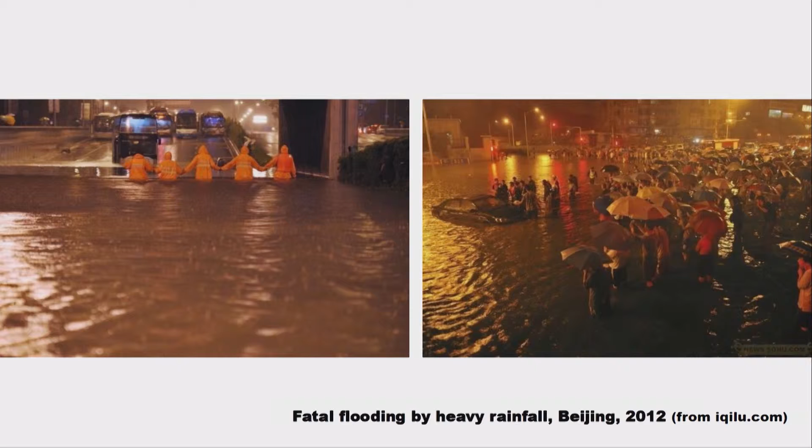This is what happened 6 years ago in the downtown area of Beijing. This flood caused by heavy rainfall actually killed 79 people within one night, and some of them were even killed inside their own vehicles, trapped in tunnels. This really rang a bell for the government that we really should do something regarding water management.

And then there's a lack of institutional innovation. We are still stuck in different sectors, different departments that are only in charge of their own narrow responsibilities. And then we lack awareness of water scarcity, because we are always taught that China is a big country.

We have lots of natural resources, and water is not really that scarce. Then we have water pollution, as I showed you, and also, last but not least, we have less market involvement in the water tariff system.

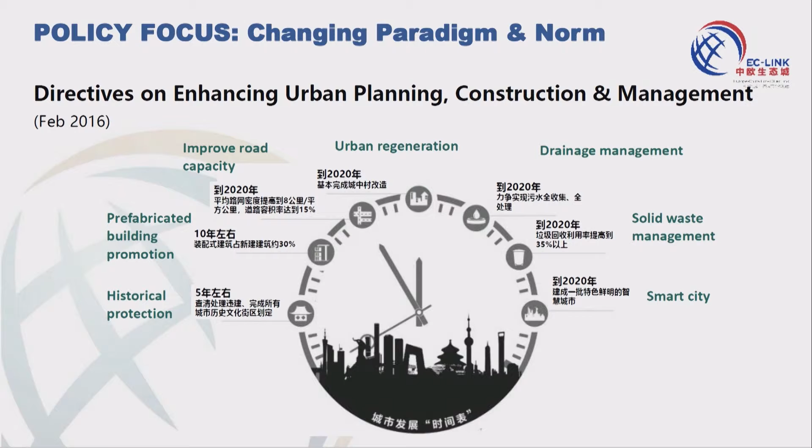The most important thing related to water management is drainage management. We're supposed to have 100% drainage management by 2020. That refers not only to the cities but also the suburban areas, which is quite an ambitious target.

As you know, China is a very centralized country. Because of the centralized political system, governments at the local level are now really pushing forward on environmental protection and trying to save the environment.

Also the guidelines on the lake governor system and the guidelines on the river governor system, which are more about institutional design. Because we are a centralized country, once we grab the key person in the system and appoint them as the so-called river governor, he can actually do something regarding the river.

Today I'm going to talk a little more about sponge city. During lunch, someone asked me what exactly is the sponge city. I would say it's a similar idea to LID, low impact development in the US, or nature-based solutions in Europe.

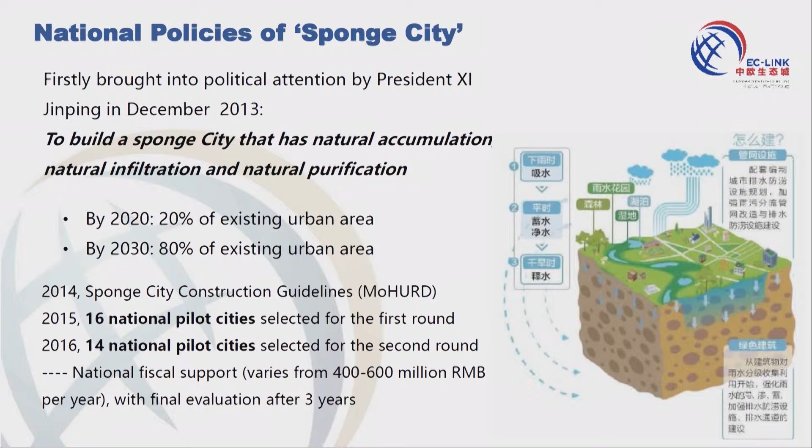In order to operationalize all these ambitious goals, we try to establish a kind of institutional arrangement. First of all is the organizational structure.

If I take the sponge city as an example, there is always a so-called leading committee, led by local political and governmental leaders, consisting of different governmental officials from all the relevant departments.

Usually it will be led by the urban planning sector, construction sector, or water management sector, but it's also relevant for transport, environmental protection, etc.

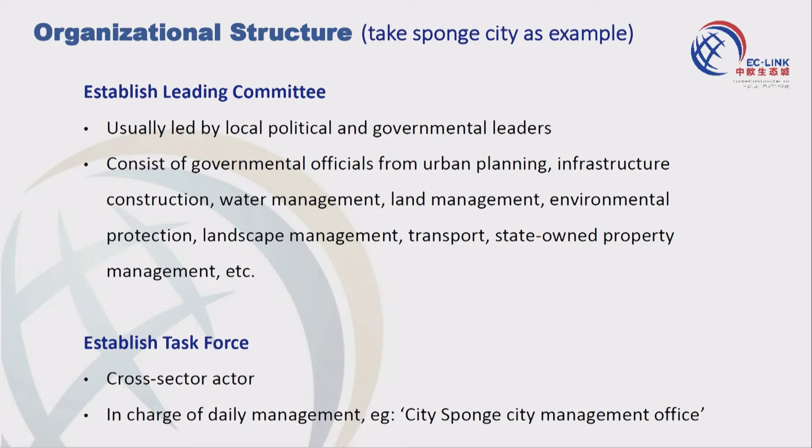Beneath that, we establish a task force in charge of daily management, the so-called Sponge City Management Office. To implement that, we have established this implementation institution, shown in the orange, yellow part.

This is supposed to be operationalized into different processes: when you transfer the land ownership, when you approve the project, when you plan the project, and then also approve the project when it's finally implemented.

For the incentive part, we have created some so-called financial support measures. We encourage the PPP, public-private partnership model, and try to attract more market forces into water management, along with some tax reductions, etc. Last but not least is the assessment system.

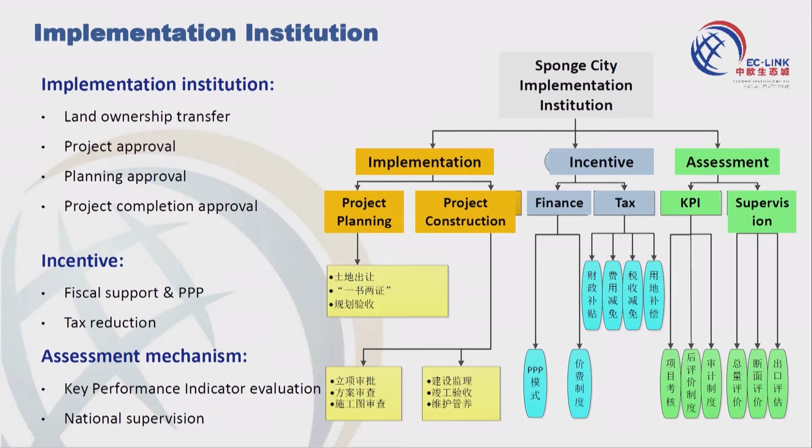There are always some KPI systems, and after a certain period of operation, there is more and more national supervision from the national ministries. I was told by some cities last week that they receive a national supervision group at least once every week.

And now for practice, I'm going to show you very quickly two cases. One is about a new city district.

It's called Xixian New District, not far from Xi'an, the ancient city that most foreign tourists would visit. It's right next to it. This orange box is Xi'an, the ancient center, and the orange part is the case. The land area is 882 square kilometers, very big, located between two municipalities, and the construction area is actually much less.

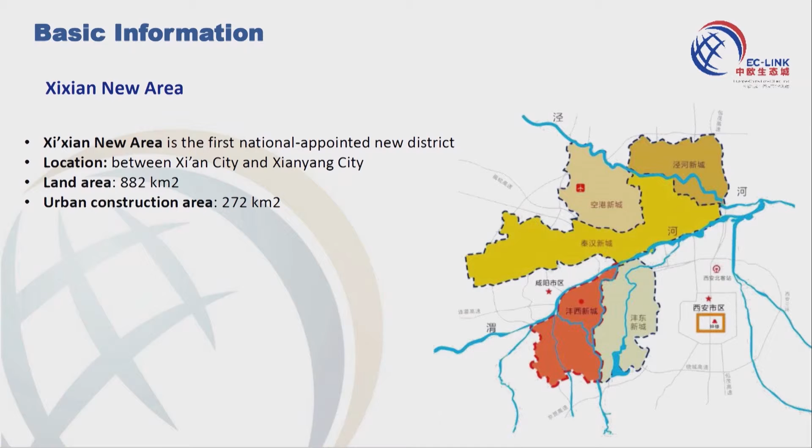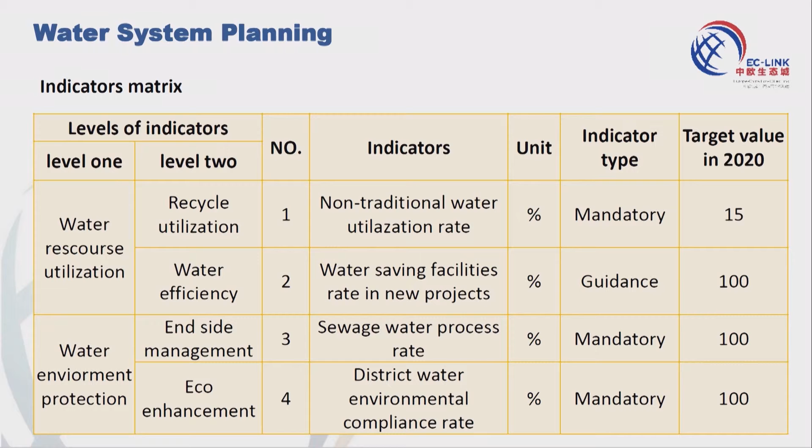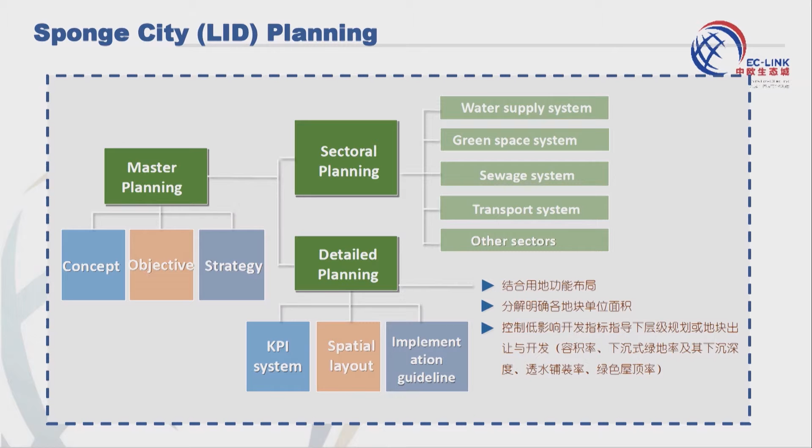It's 272 square kilometers. As I said, they always start with a KPI system, and this is the KPI relevant for water management. They divide it into two parts: water resource utilization and water environment protection. Then they operationalize into more detailed indicators, these 4 indicators, and set up more quantitative objectives. We like quantitative objectives because they're easier to evaluate. Then, in order to reach those indicators, there are the master plan, sector plan, and detail plan related to achieving those quantitative objectives.

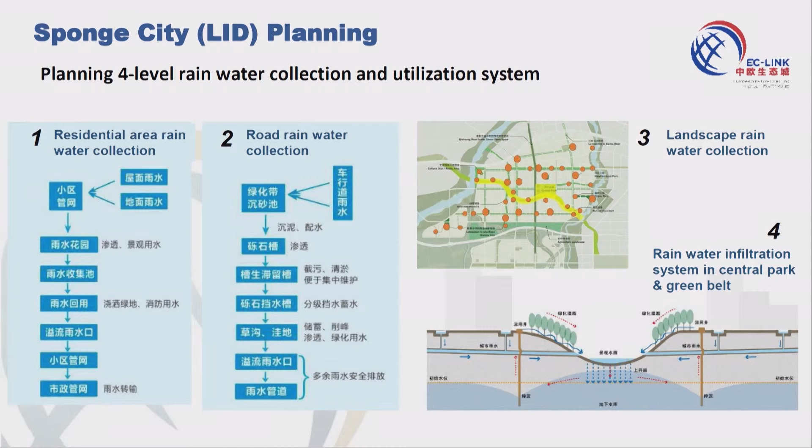On a spatial level, I'm an urban planner. They propose 4 levels of planning: one is residential area, one is road, third is landscape, and fourth is more like the Central Park and green belt. If we see it one by one, on the residential area, they want to collect the rainfall through a rainfall garden, a rooftop garden, etc., and then flow it into the central park or into the drainage system. This is what's happening over there.

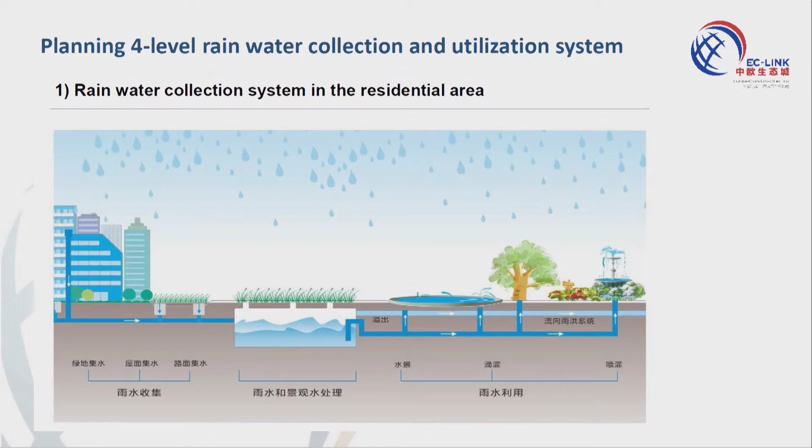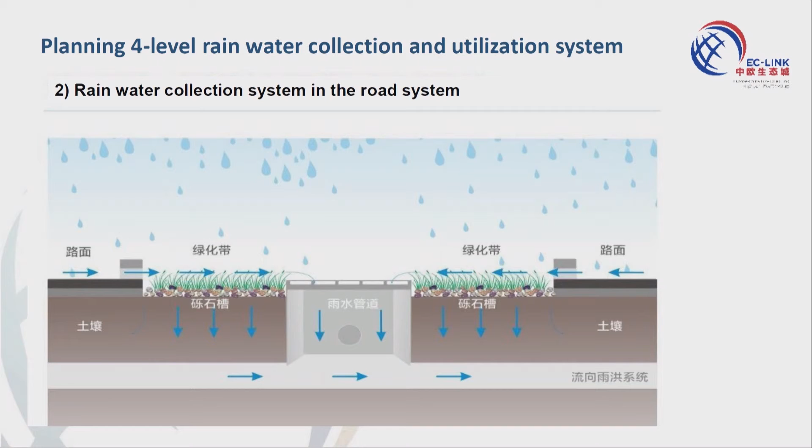These are the rainfall gardens in the social housing community. Second is the road system, I don't need to explain too much, it's self-evident, and this is what's already been built up. As you can see, they've moved a little further to also think about different combinations of plant species, to make it not just functional but also a landscape.

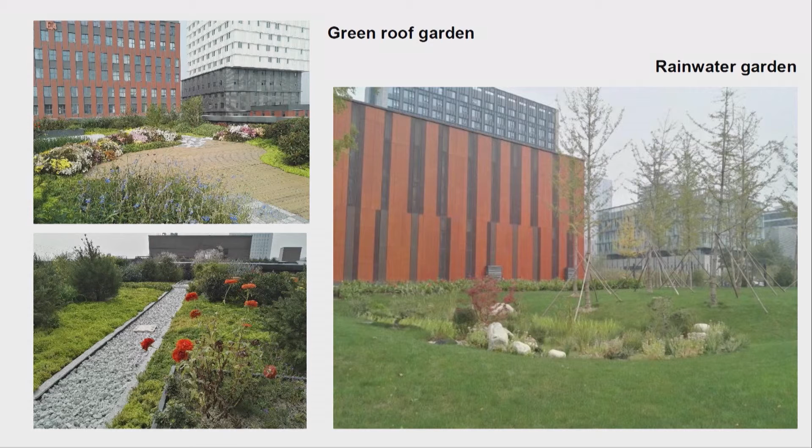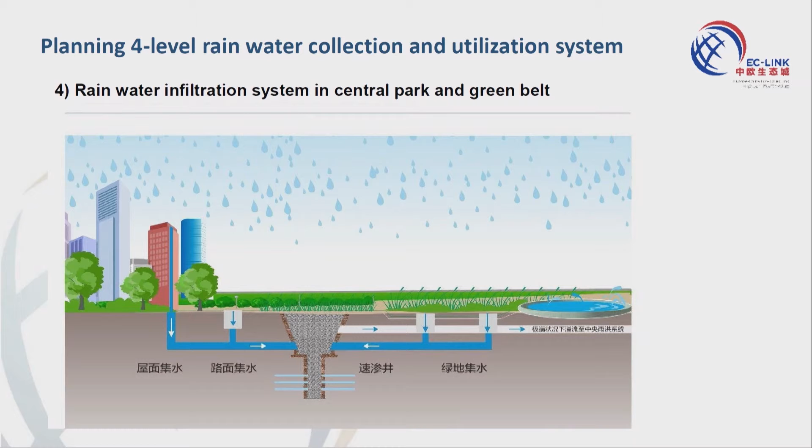Thirdly is the green landscape. They have green roofs, I think in the office area, and also rainwater gardens. During lunch break, many people actually enjoy themselves in those areas. Fourthly is the Central Park and Green Belt. In the urban design, they made this Central Park and Green Belt along the whole district, and so far the first phase has been completed, as you can see in the other pictures.

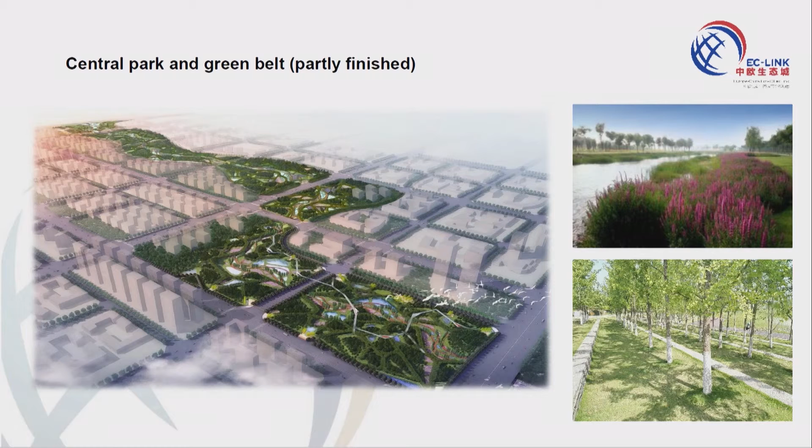So to conclude, after all this is completed, it can reduce 60% of the volume of runoff and extend the recurrence period of rainwater from 2 years to 3 to 5 years, but this is not very impressive. Okay, that is the new area. I'll try to be quick.

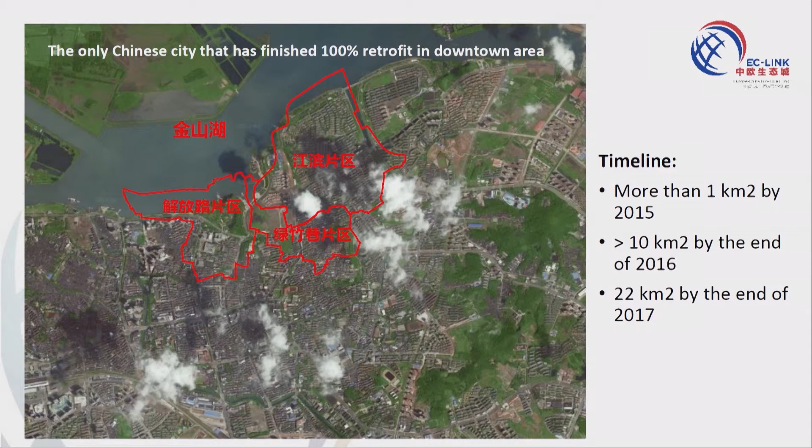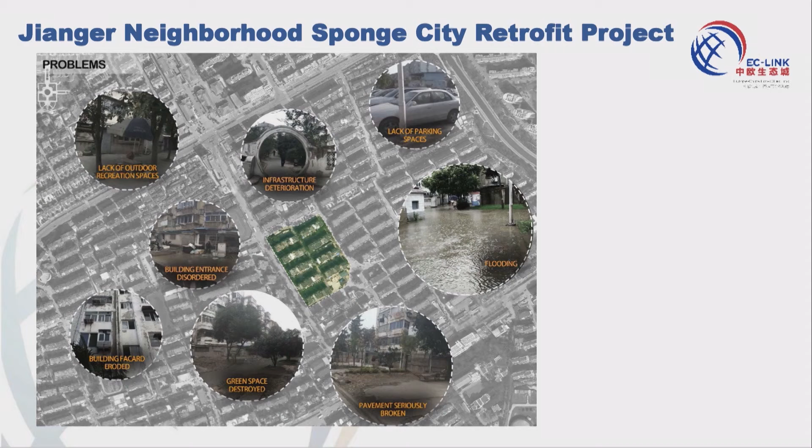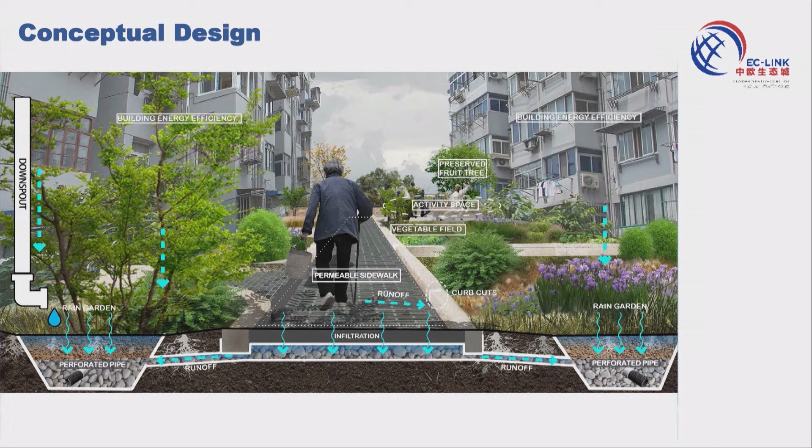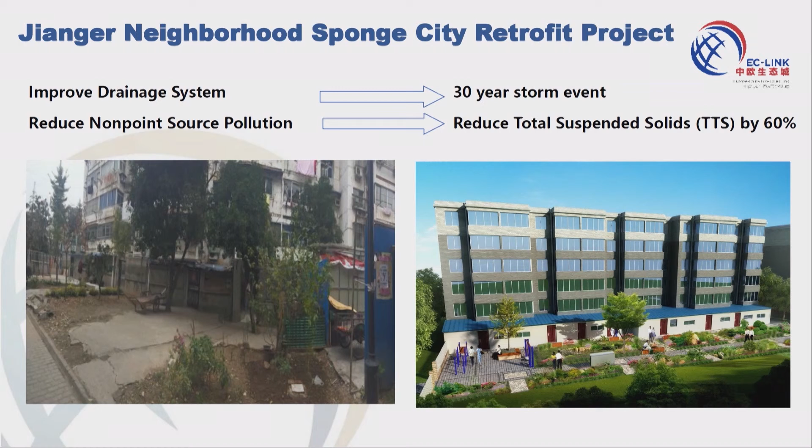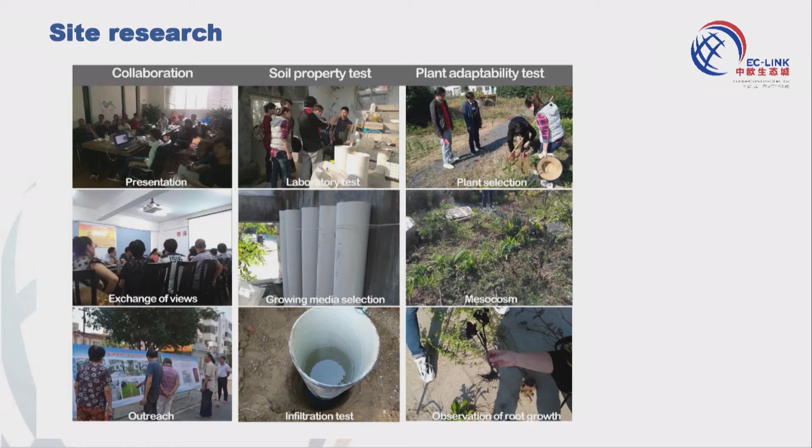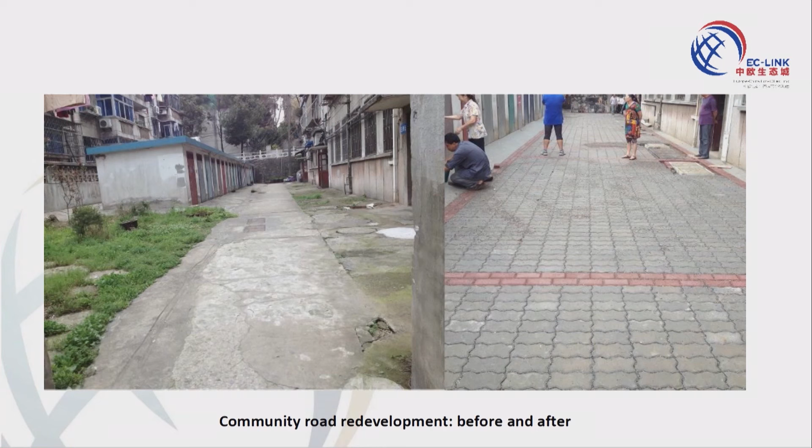Before doing the real project, they start with some bottom-up approaches. They talk to the communities and do a field trip several times in order to have a tailored approach for this community. This is what was happening during construction at that time; as you can see, the buildings there are still quite old. They tried to replace the pavement of the road and replace the whole parking system.

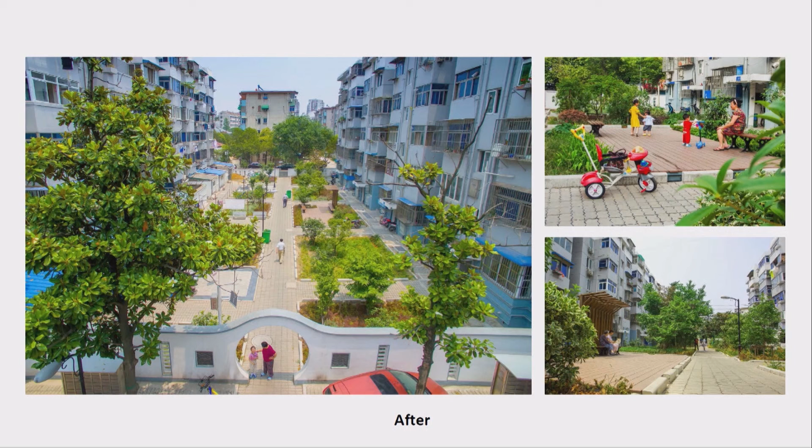And this is what it looks like right now. It's not that fabulous, but for this kind of old neighborhood, it provides enough capacity for rainfall. This is what happened before, it always got flooded because it's quite a low area. But now this is what happens, I think last year there was no flood at all.

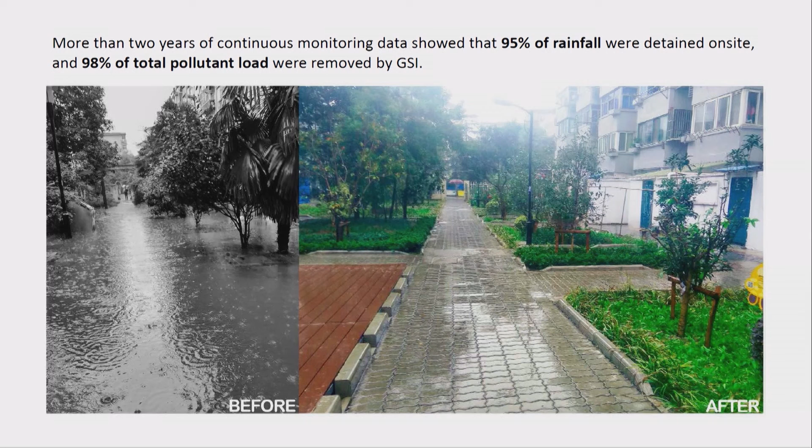So far, I just want to highlight that China is making a great move towards becoming a resilient city, and I'm very happy to hear what you said there. Actually, I know a bit about this 100 Resilient Cities project. There are 3 Chinese cities involved, but I didn't hear too much from them, at least from your website, so I would expect more from them. Thank you.